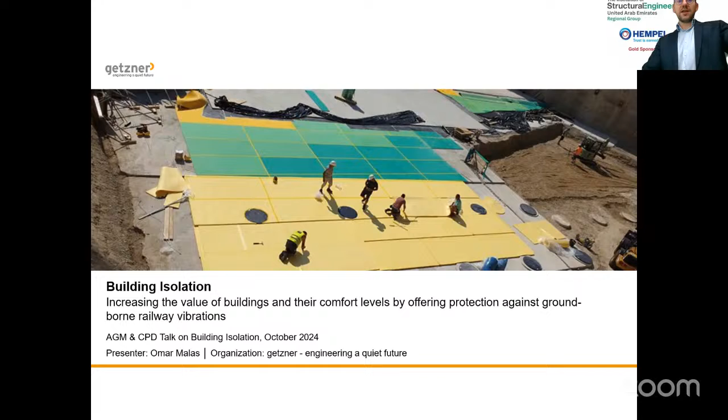Today, we would like to address this topic. The main target is to introduce the problem, introduce the solution, and a very interesting case study we have from Germany.

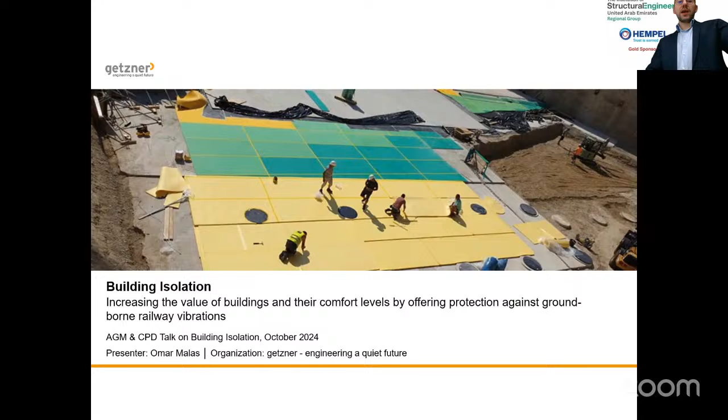We are increasing the value of buildings and their comfort levels by offering protection against ground-borne railway vibrations. Thank you, Iman, for introducing the team and I.

If my colleagues would like to say a few words about themselves or just to say hello, please feel free. Hello, Ulrich Gerhaher, my name. Yeah, I guess I was introduced good enough. I'm working for Getzner 10 years now. I don't think we can hear you, Ulrich. Oh, microphone is switched in. Online, but not okay. Sorry, you can't hear me? All right. Hello? Oh, okay. Okay, I can hear him. We can hear you online, but we can't hear you here in the room, so it's fine. But okay. Anyway, thank you, gentlemen.

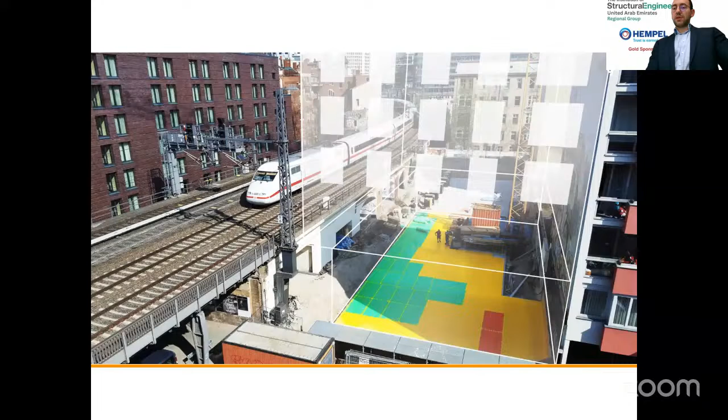Starting by introducing the topic, what you see on the screen is a project in Berlin, which provides a perfect example for the need of elastomeric or elastic building isolation. Here you can see a railway line directly adjacent to a construction site. Of course, vibrations occur every time the train passes by the building, and the vibrations are transmitted as structure-borne noise through the ground and then into the construction site. This project actually shows an example of a full-surface elastic decoupling with our products.

In this project we use the Sylodyn product, which is a polyurethane bearing. Like Iman said previously, Getzner has developed this in-house. These products are shown in green, yellow, and red, and are designed and installed to provide enhanced comfort to the building occupants by absorbing the vibrations and disturbance caused by the source. So in a nutshell, this is what Getzner does. We manufacture these highly advanced polyurethane products, highly advanced elastomeric products, for the purpose of vibration isolation in buildings and also other sectors.

It is important to distinguish between primary airborne noise and secondary airborne noise. The primary airborne noise is that which is transferred directly from the source, which in this case is the railway, to the recipient, which is the building, through the air.

The secondary airborne noise is the result of vibrations that are transferred from the source through the structure and the ground into the building, causing vibrations within the building that in turn transfer to what we call secondary airborne noise, or structure-borne noise.

So our company and our expertise, and in this presentation, we are addressing the topic of building isolation against vibrations and secondary airborne noise from railway lines that are coming into buildings that are still in the planning and design stage.

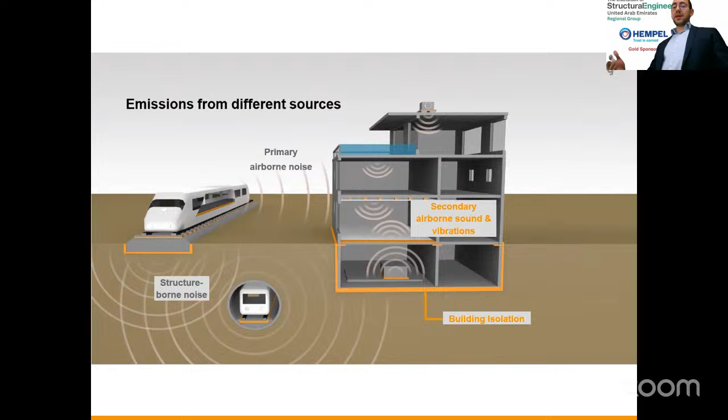There are several solutions from Getzner available. The bearings can be applied as full surface mats, or as strip or point bearings, depending on the various site and design conditions.

Just to briefly describe each solution: the full surface bearing is basically a full surface mat that's very easy to shape and install. It should achieve higher natural frequencies, i.e. lower performance compared to the point and discrete bearings. At the same time, little soil or subsoil preparation is required when installing this type of material in such geometries, and no changes to the structural design are required when installing full surface mats.

On the other hand, strip bearings are usually installed on strip foundations. They provide the ability to achieve vibration decoupling between individual floors of a building. They are more affordable than a full surface mat material-wise, and they achieve lower natural frequencies, i.e. higher performance. At the same time, they require special structural designs and special attention when doing the design of the building.

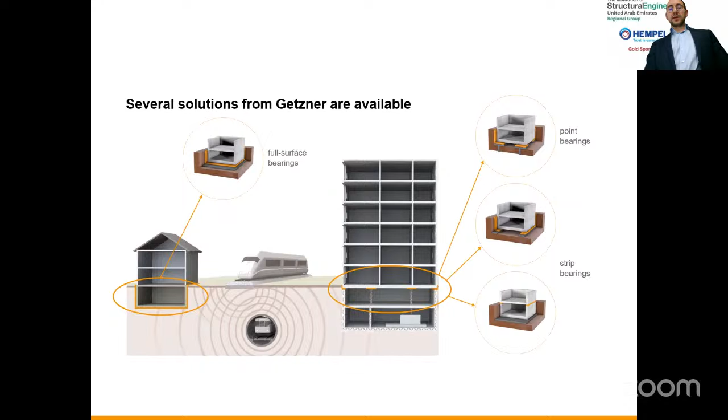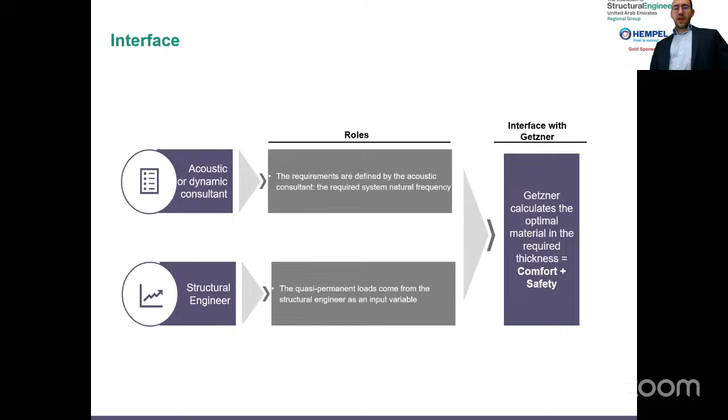So just to give an overview of where we fit inside the project, what is our relationship with different stakeholders from a technical perspective: we mainly have to engage with acoustic or dynamic specialists and structural engineers.

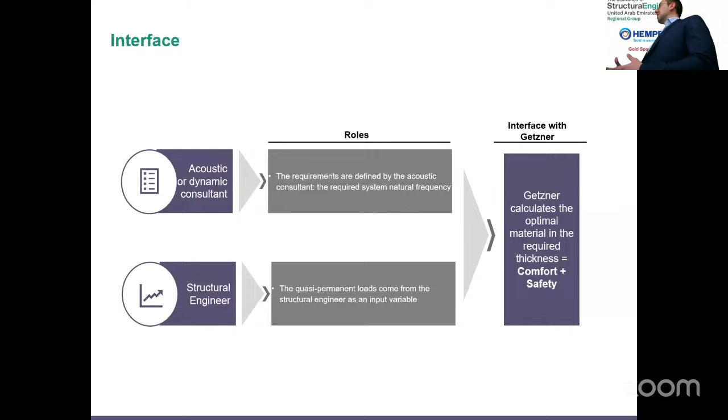Usually acoustic and dynamic specialists are responsible for setting the acoustic requirement in a building, mainly the natural frequency of the bearing, after they do their own measurements, analysis, and vibration prognosis. At the same time, the structural engineer's role is to provide us with the loads that would be acting on the bearings.

By having both input from the acoustic engineer and the structural engineer, we are capable of calculating the optimal material, the optimal elastomeric bearing with the required thickness, required stiffnesses, and required load capacities to fulfill the acoustic and load requirements.

This means that we are fulfilling the comfort criteria and also the safety criteria when we talk about acoustics and structural input. It is also important to note that all of these bearings must be certified by third parties, so that the properties of the products used in the calculations are actually verified in reality. This way, the safety criteria is also met.

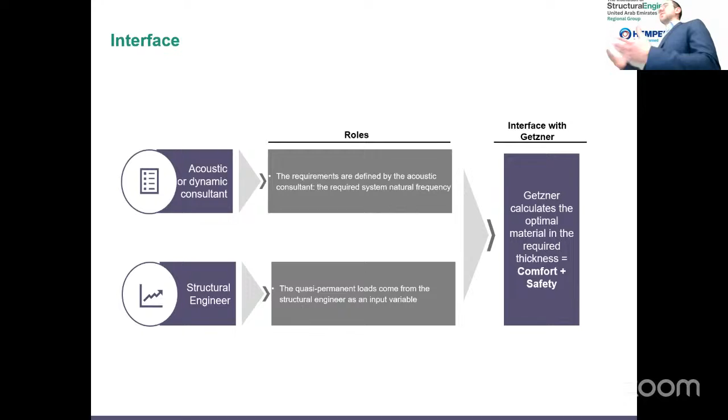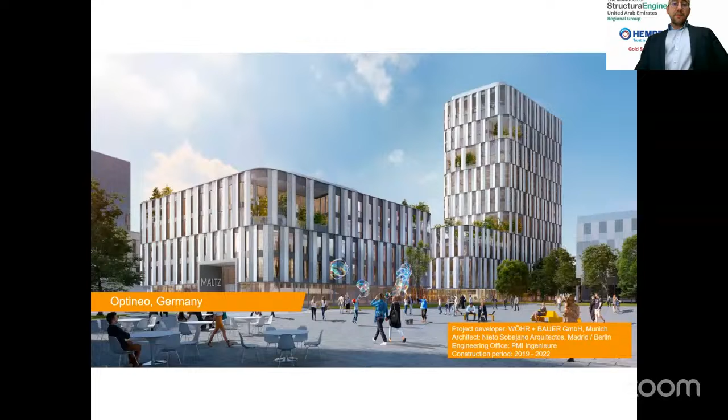I will start with an overview of the case study we will be presenting today. It is the Optineo project in Munich, Germany. It is a development with approximately 32,200 square meters of gross floor area above ground, mainly offices rented to KPMG, with restaurants on the ground floor.

There are over 1,100 square meters of roof terraces and loggia. The project developer was Wöhr + Bauer in Germany. The architect is Nieto Sobejano from Madrid, also based in Berlin. The construction period was between 2019 and 2022.

The development is actually located in the Munich East train station development area, which used to be an old industrial area, but right now is becoming the new trendy place in Munich with many mixed-use developments and concert halls. The challenge for developments in that area is that they're usually very close to the railway lines, including the Munich East train station, which is the second largest train station in Munich.

This means that the railway lines are at a distance of less than 50 meters from the Optineo, including a branch line of less than 30 meters. Here we're talking about all kinds of traffic, including freight, passenger, and long distance international trains.

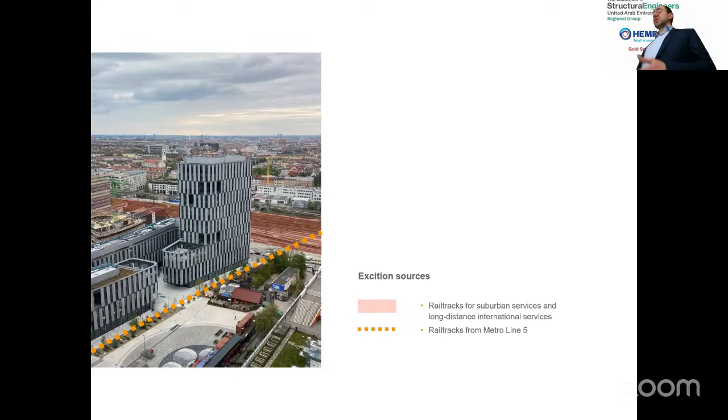At the same time, the main source of vibration is the underground Metro Line 5, which is dotted in the orange line you see on the screen. This line is actually 30 meters deep into the ground. Since the Optineo has around 3 floors underground, this means that the metro tunnel is roughly just 15 meters away from the building.

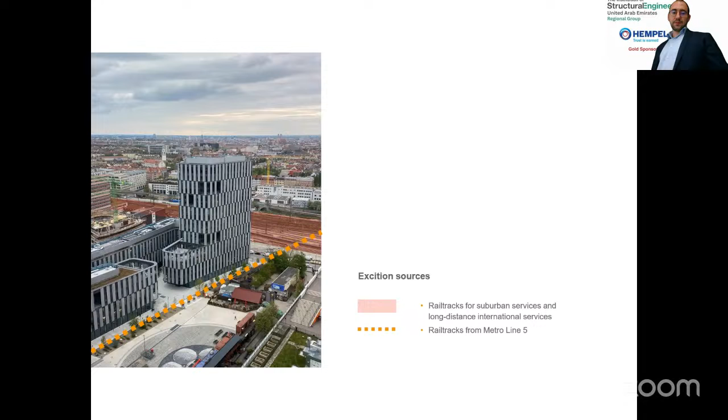There was a previous old building there, and the metro tunnel below that building has been there since the 1970s. It's an old tunnel, no longer the most stable, so no extra forces on the outer shell of the tunnel were allowed. Therefore, the deconstruction and construction of this old building had to be carried out gradually so that the loads on top of the tunnel do not change a lot.

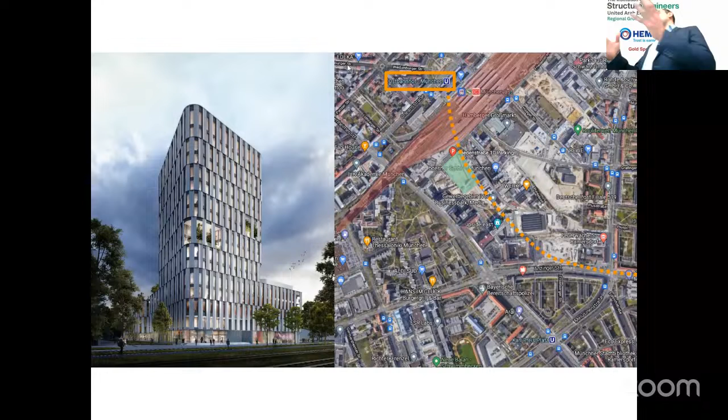This meant the construction company had to, after the deconstruction phase, mobilize the rubble gradually outside of the site so that the loads do not change drastically or quickly on the tunnel during the deconstruction and construction phase.

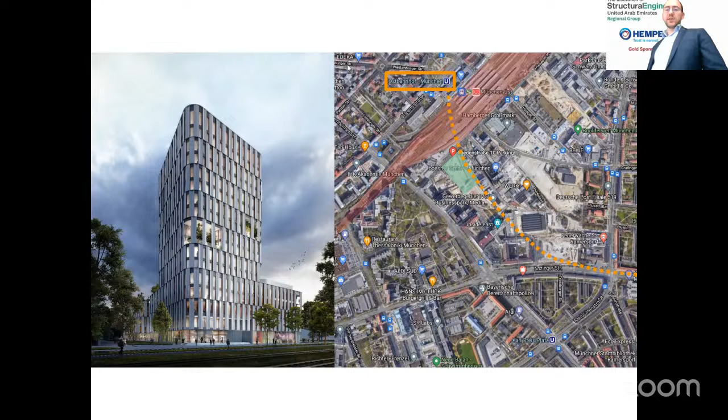A quick overview on the legal situation and project limits according to regulations in Germany. I won't go into detail about the acoustic requirements and standards, but briefly, the acoustic consultant and dynamic specialist had to ensure vibration levels do not exceed a certain KB value, defined and evaluated according to the German standard DIN 4150-2, which relates to the effects of vibrations on humans.

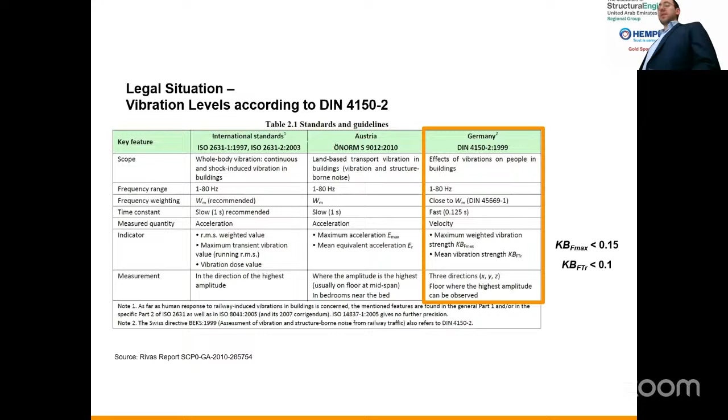This roughly equates to the limit fixed between 0.1 and 0.15, roughly equating to 0.45 millimeter per second in terms of vibration limits. There were also recommendations and guidelines regarding secondary airborne noise levels, such that the maximum sound level in this project should not exceed 45 dB.

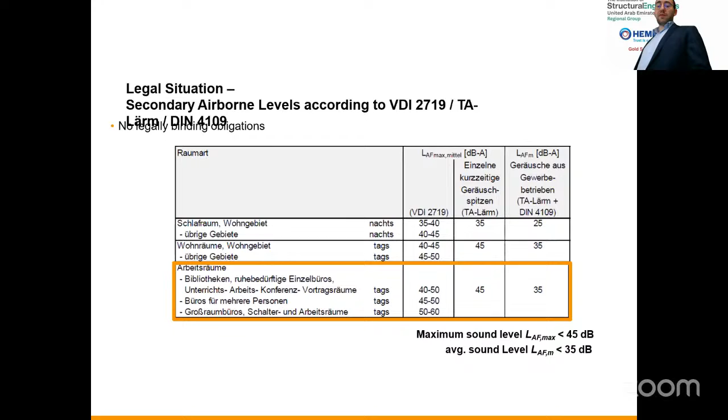Therefore, the dynamic specialist acoustic consultant was brought on board, and the measurements and prognosis model started in the project. The measurements on site had to be done in 3 stages.

The first stage was on the surface, where vibration measurements suggested the vibration levels are way higher than the limits. Then a second campaign of measurements took place at minus 12 meters, at the foundation level of the building using drill holes. They also suggested that the vibrations are actually higher than the limits.

Then a third campaign of measurements took place after the whole excavation was done, and they confirmed the values and results taken in the second campaign. In this project, the type of soil is gravel. It's quite stable, but at the same time it transfers vibrations into the building.

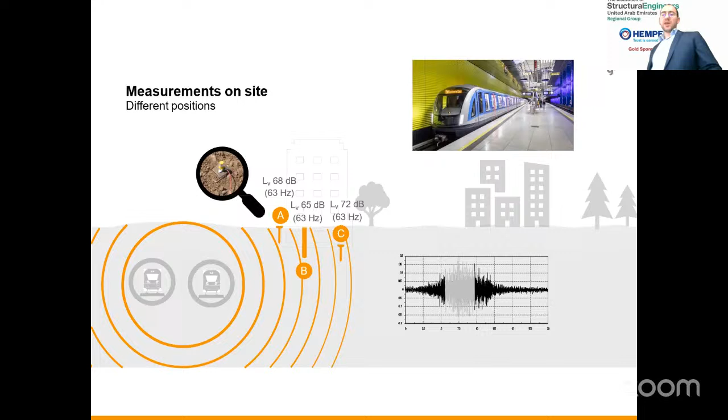It was also important to define the frequency spectrum. The main excitation frequencies are shown on the graph, and it was realized that the main vibrations and secondary airborne noise were happening at frequencies above 40 Hertz.

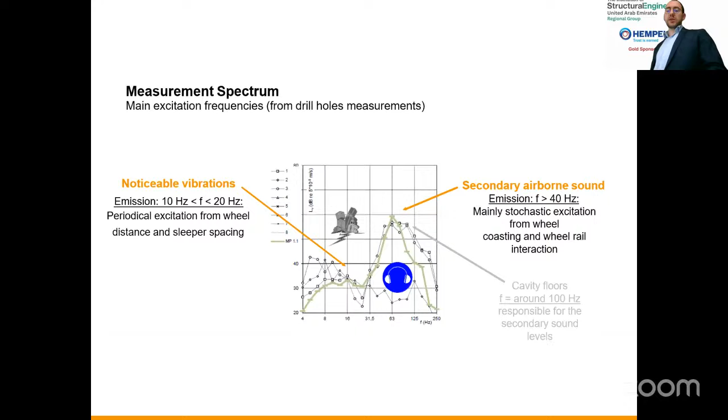In order to reduce the uncertainty in the transmission path, several measurements had to be carried out along the transmission path between the railway and the building. This is why you see the measurement points MP1 to MP3. As can be seen in the graph, the vibration level is actually reduced as the distance from the excitation source, the railway, increases up to the building.

This is due to the coupling effect from the soil to the building, which usually leads to further decrease in vibration velocities. At the same time, due to coupling effects of the building itself, you can notice an increase in vibration levels at MP5, because of the coupling effects of the building structure itself, which caused an increase in vibration levels due to the natural frequencies of the structural slab and the floating screeds.

It's very important to note that measurements alone are not enough. The realization of the excitation frequencies and the measurements alone are not enough to define the acoustic requirements and to realize the size of the problem. After those measurements are taken, these results should always be used as input in a vibration prognosis model made by the dynamic specialist, to eventually model the vibration levels and secondary airborne levels inside the building based on these measurements taken on site.

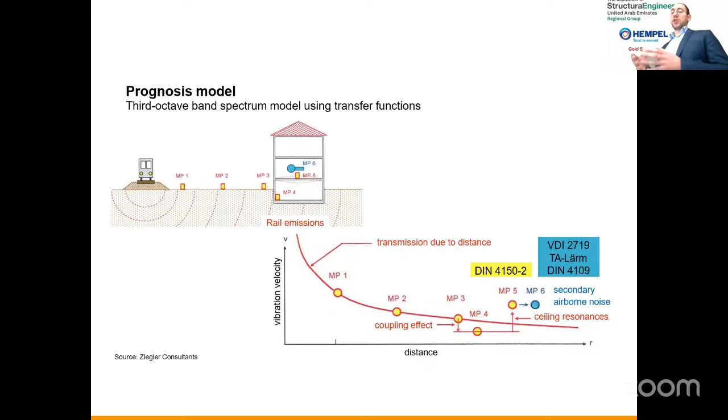This model, done by the dynamic specialist in a prognosis, depends on the building geometry, the stiffness of the ceilings, the walls, and the building structure, and also the sound insulation measures taken into consideration inside the building.

So the dynamic specialist in the Optineo project did a prognosis, and here in this table you're seeing the results without an elastic decoupling. After they did the measurements in the soil, they modeled the building, identified the resonance frequencies of the individual elements inside the building, and realized that the maximum sound level would exceed requirements.

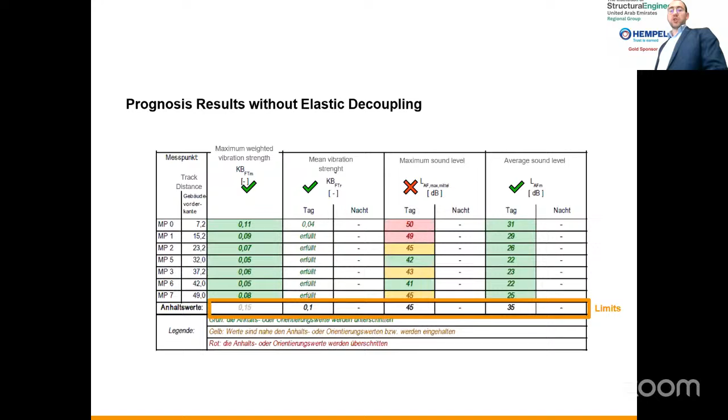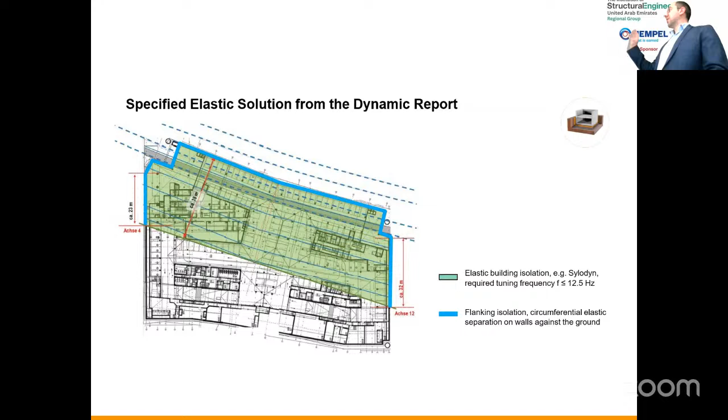At different positions the level will exceed the required limits of 45 dB in this project. Therefore, the dynamic specialist recommended that at least half of the building be elastically decoupled, with a solution having a natural frequency of less than or equal to 12.5 hertz. This led to the definition of the natural frequency requirement for the elastic bearing solution. According to the prognosis results, with the 12.5 hertz elastic decoupling, all acoustic requirements from vibrations and secondary airborne noise levels will be met inside the building.

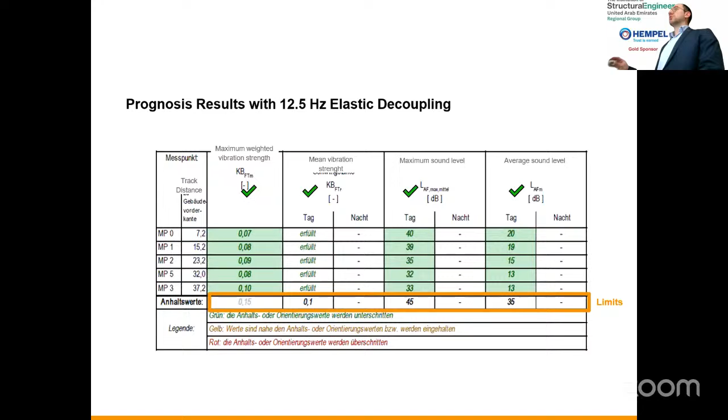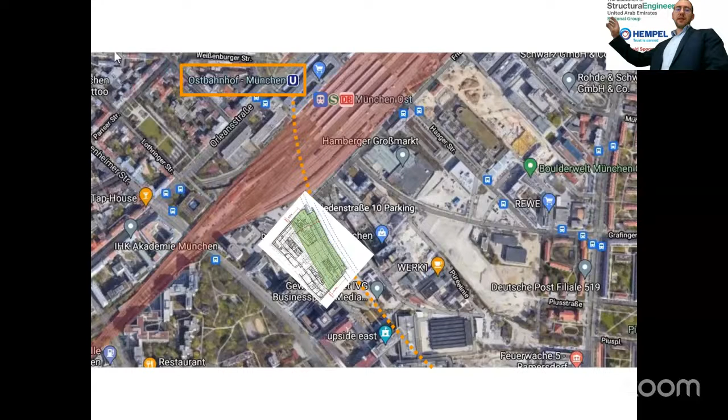Now moving forward to the solution itself - how does it look like on site, and what kind of material are we using? Here again we're showing the building and where the decoupling is happening as a footprint next to the railway line.

A quick note about the colorful material you're going to see in the next few slides - this is our brand, Sylodyn, used in this project. It's a polyurethane elastomer with pronounced spring characteristics, made of closed cellular structure, which means it maintains high performance even when submerged in water, without losing its dynamic and static properties.

It's able to maintain its mechanical properties for the lifetime of the structure. You can see different colors because each color represents a different type of material, and each type has a different static load limit. The materials can withstand up to 24 Newton per millimeter square as load peaks, and they have a very low creep tendency.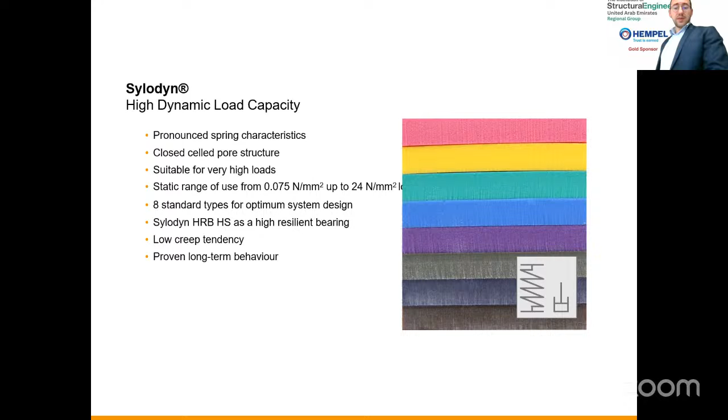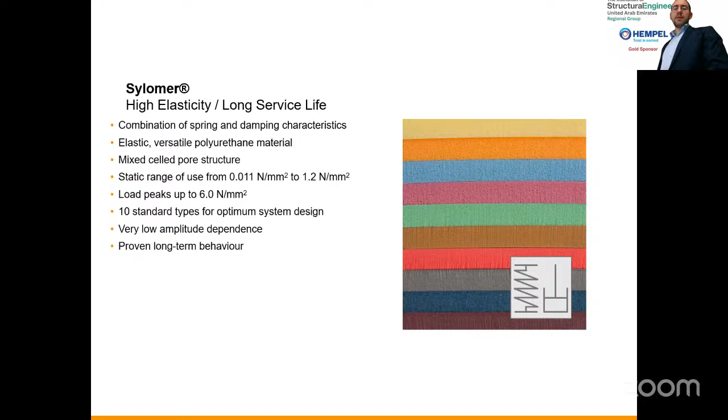We also applied our Sylomer product line. It's very similar to the Sylodyn line but with higher damping properties, used mainly in areas like foundation side mats that are not submerged in water, because it's made of mixed cellular structure instead of closed cellular structure. It also has different varieties and colors representing types with different static ranges of use, up to 1.2 Newton per millimeter square. We used it in part of the foundation, which I'll talk about shortly. There are 10 different types of Sylomer, with proven long-term behavior and characteristics.

So again, we got the requirements from the acoustic consultant - the natural frequency requirements - and we got the load input from the structural engineer. We worked closely with both stakeholders to design a material and create a material proposal that ensures comfort levels are met and safety requirements are also met.

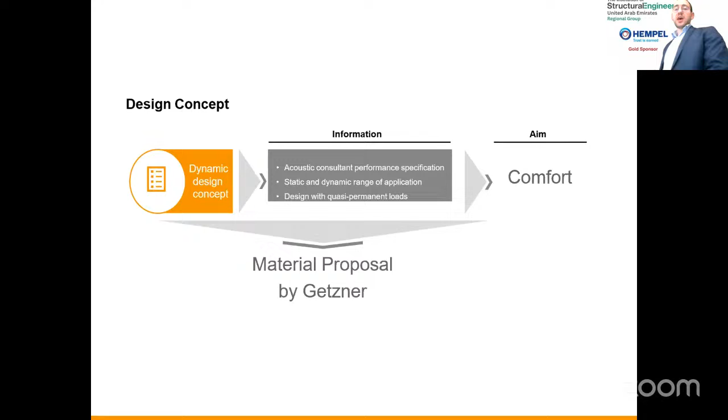Here we're showing a screenshot of the calculations we made for the engineer - a calculation with full surface bearing. The material selection is made with the loads on the static range of use of the bearing, so different types are installed in different positions depending on the loads acting there. In this calculation, the natural frequency of the individual bearing is calculated, and subsequently the average natural frequency in relation to the building, which in this case was calculated to be 11.6 hertz - less than the required 12.5 hertz by the acoustic engineer. This means the product fulfills the requirements.

As you notice, Sylodyn was used because most of the horizontal mats applied were submerged in water - the groundwater was around 8 meters below surface level - and Sylodyn can maintain its performance even when permanently submerged. Loss factor is also mentioned in our calculation because it aids in the effectiveness of the isolation due to the difference in impedance between the soil and the elastic bearing.

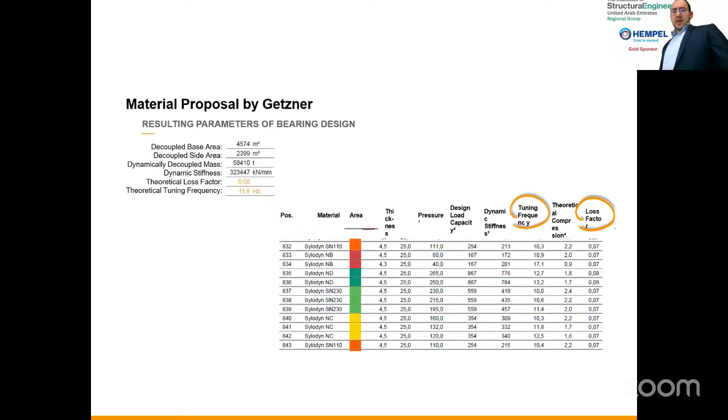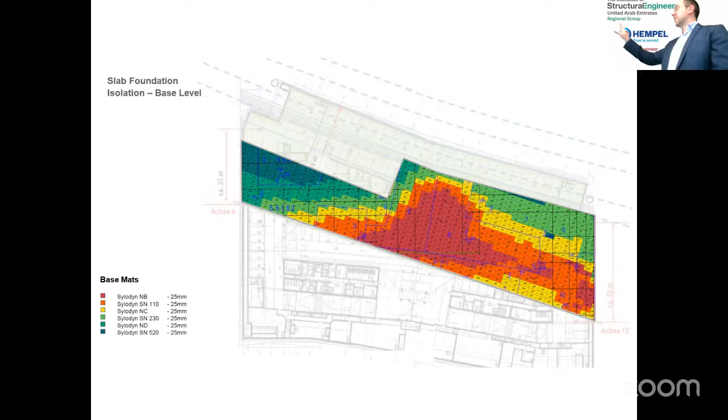And we provide this map for ease of installation on site. Here you can see the map with the actual installation on site. The mat is provided in sheets or rolls, and the joints of those sheets are taped with a joint tape so that when concrete is poured, it doesn't pass in between the joints and cause what we call a sound bridge or a vibration bridge.

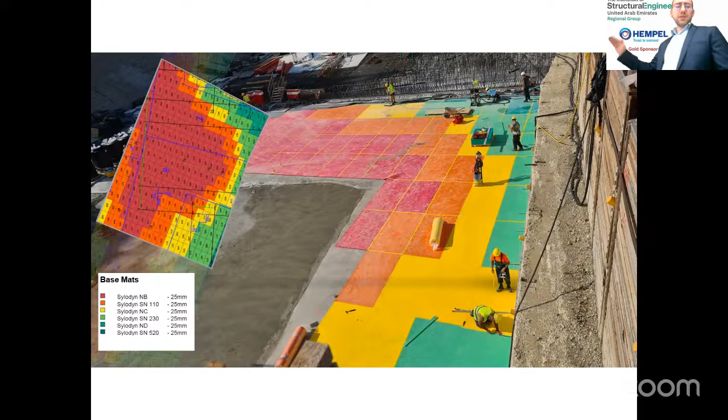At this level, the materials are installed on a blinding concrete layer. Here you can see another photo where the materials are installed at the base level. A PE foil is installed on top of them, and then a screed layer is installed on top of that. Afterwards, they start with the heavy reinforcement before installing a 3-meter thick slab in that area.

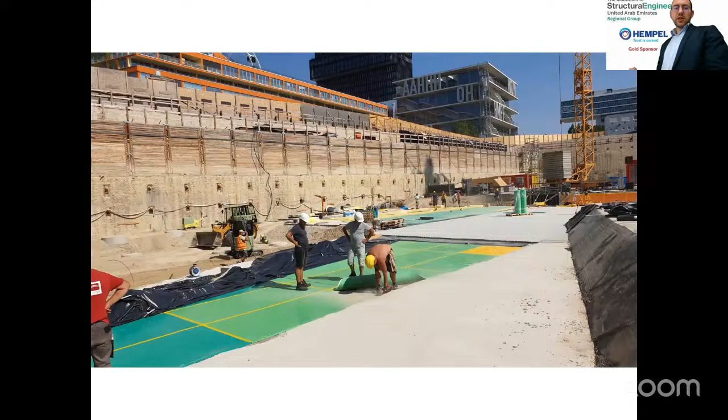Here are additional impressions from the site. The material, as you can see, is very lightweight. It doesn't require skilled labor to install.

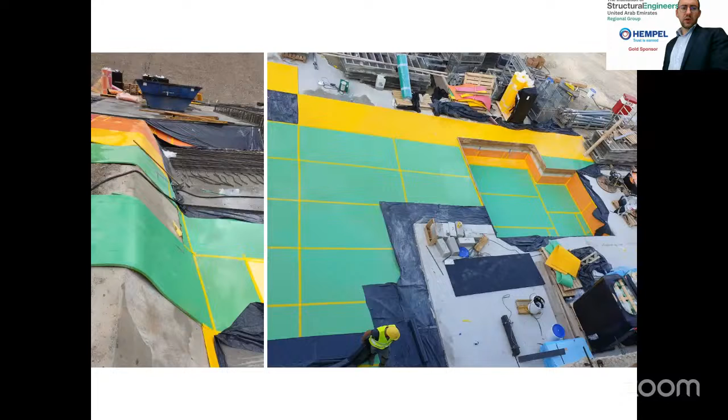The materials cover in green, yellow, orange, different geometries, even pits, and it's covering the whole area so that no gaps, no areas remain unisolated.

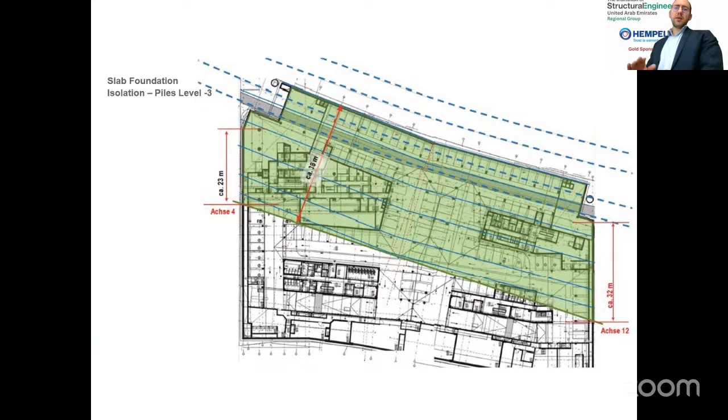Also in level -3, there were piles because there were piles in some areas, because on top of that area there was a 10-story building. So this section of the development had the highest loads.

And as we said previously, there's a tunnel beneath this development. So in order not to increase the loads on the tunnel, piles were installed or were constructed in that section specifically to transfer the loads to a lower part of the soil, in order to avoid activating the outer shell of the tunnel with additional forces.

And on top of the piles, on the pile caps, our stiff bearings were installed that I will show you in the next slide.

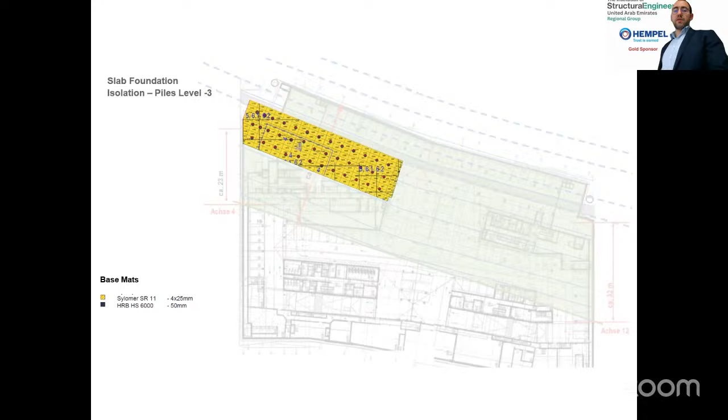The yellow material in between is a soft Sylomer material in 100 mm thickness that was used mainly to avoid compression force. This means that the piles were taking the loads alone. The bearing on the pile cap was taking the majority, the main load, and transferring it to the lower parts of the soil to avoid activating the loads on the tunnel, while the infill material in yellow was just used to avoid the compression force. So it wasn't actually taking the loads.

And here you can see a better, clearer photo of it from the side. You can see the black dots where the piles are located. And on top of this area is the 10-story building.

In the black dots, we have installed our stiff HRB HS 6000 materials that could withstand 6 Newton per millimeter square in permanent loads.

And they're installed as round bearings. And again, as I said, the yellow material is the Sylomer material used just to avoid the compression forces, to absorb the compression forces. It was compressed by around 25 millimeters. Then on top of that, there's a slab thickness, which is around 3 meters.

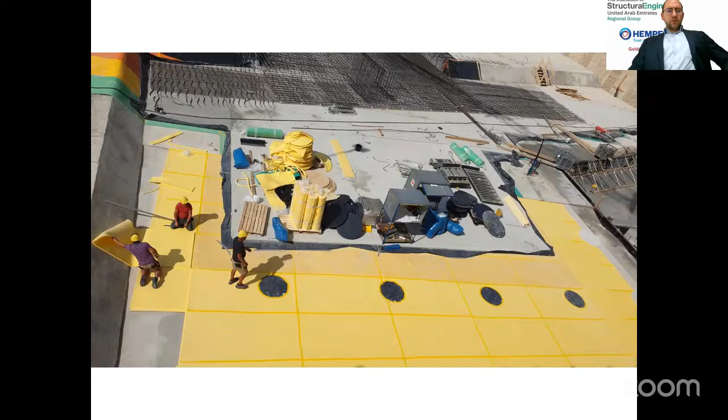Here you can see additional photos of the same area. They are, as you can see, materials very easy to handle on site, very lightweight. PE foil being installed, screed being installed on top, and then as you can see at the top of the photo, the reinforcements are also installed on top of the lean concrete.

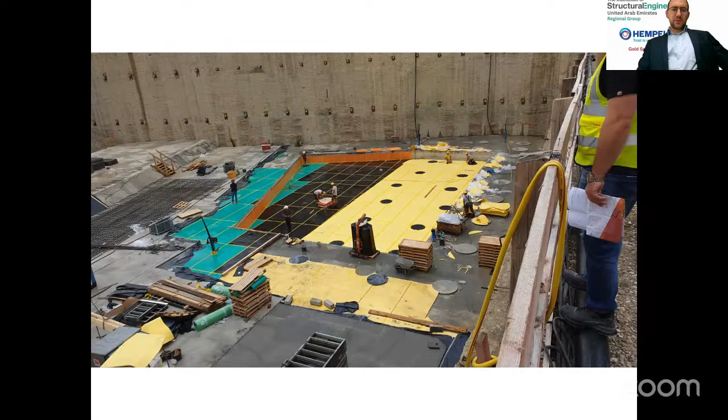Additional impressions from the site. And here you have clearer pictures of the pile cap and the pile bearing in black, and the yellow infill in Sylomer 11 in that area.

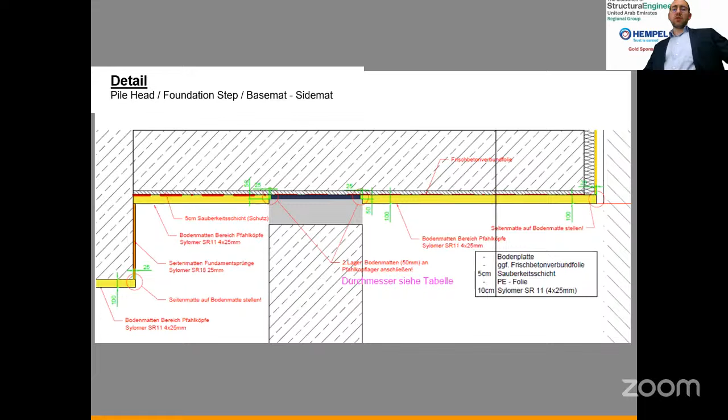And this was kind of challenging to construct, because again the backpack would mean additional loads on the tunnel. So here they had to think of an innovative way of building the backpack in a way that the loads are not immediately going to the tunnel.

So what's happening here is that the loads are actually being transferred to the piles instead, rather than being transferred from the backpack directly to the tunnel.

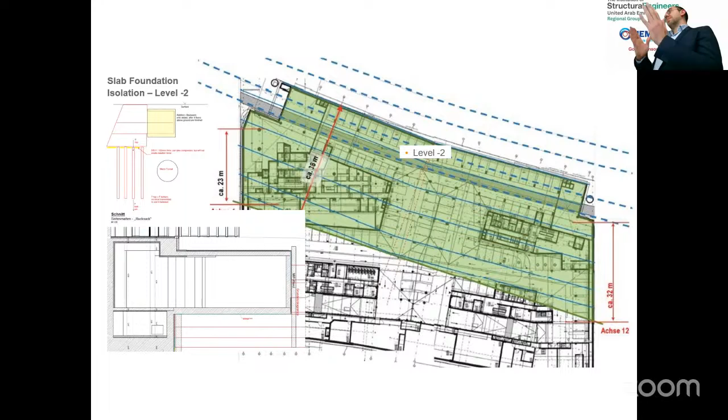This has been done by first building 4 stories of the building above the surface, so that there's a balance before introducing the backpack in the other section of the building. Therefore, the loads are now being carried by the slab and the piles instead of being transferred from the backpack to the tunnel and then creating instability in the tunnel.

This also meant for us that the materials we have to use below the backpack are actually of a softer grade, because we didn't need a material that would need a very high static range of use with very high static load capacities.

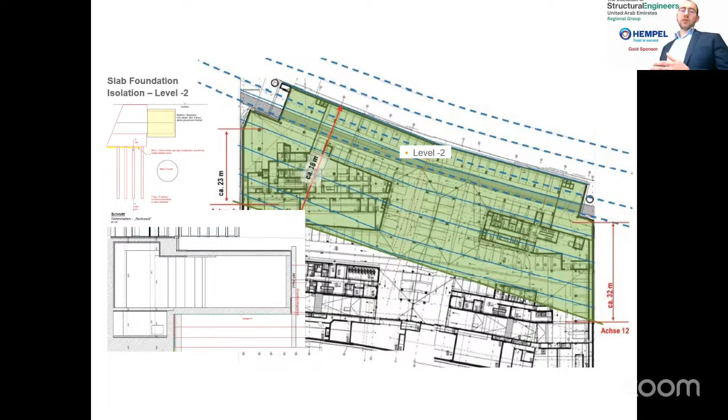With this way of construction, the building will settle just uniformly, because initial studies showed that the piles will settle around 2.5 centimeters, and the backpack would also settle, which wasn't good for the tunnel. This is why they started building first 4 stories above the ground, and then built the backpack, to avoid the settlement of the backpack and protect the tunnel.

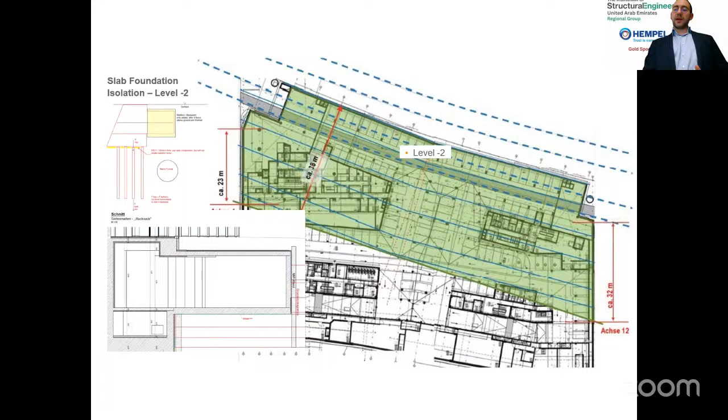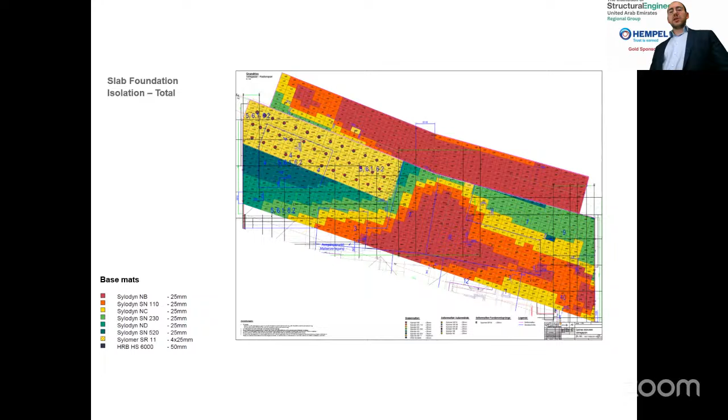Here in this slide, you're seeing the overall isolation. So now we have the full picture complete. We have the isolation of the piles, in level -3 we have the isolation in the base, and finally on top, in mostly red color, the isolation of the backpack in level -2.

Here we were talking mostly about the horizontal isolation, but it is also important to make sure that the lateral isolation of the sidewalls of the buildings below the ground are also decoupled, because vibrations can transfer also horizontally and then into the building itself. So it was very important to isolate the sidewalls of the building underground.

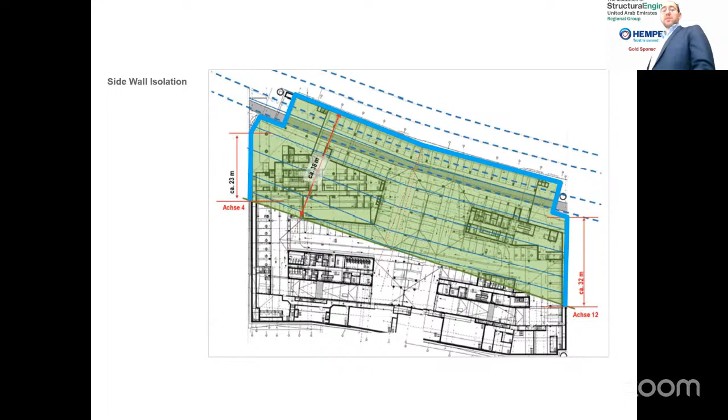Because of the challenge of the groundwater, it meant that 2 different types of product lines needed to be used, since almost half of the sidewalls down to -8 meters were submerged completely in groundwater. We needed to make sure that the material installed below water could maintain its performance over the long term of the project. This is why we used Sylodyn material below ground, and above ground we used Sylomer material, which wasn't required below the groundwater level.

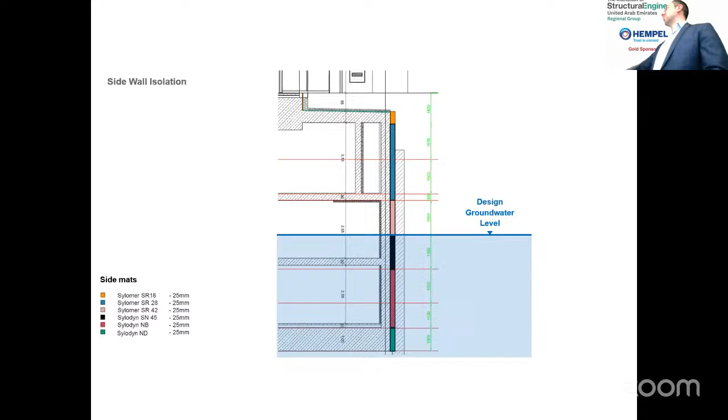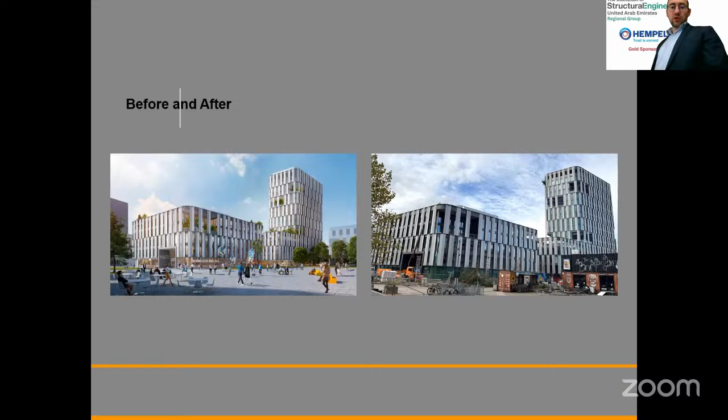Finally, we show you the results before and after. On the right-hand side of the screen, you see the photo of the building after it has been constructed, or almost towards the end, and the measurements taken afterwards prove that the prognosis made by the acoustic consultant was actually correct, and the material is performing as per the prognosis.

All the vibration and maximum sound levels are met. This means that people can work comfortably in the building, and that the value of the building is high. The owner of the building, the developer, could rent it out to companies like KPMG without any complaints, and without KPMG looking for a different office elsewhere because of continuous noise and vibration problems.

So this product was an initial investment in the project. At the same time, it increased the value of the building a lot. It allowed the developer to rent out his building, increase the profitability of his asset, and make the best out of it. Thank you for your attention.

Yes, so all in all, this is our daily business. We have been reducing vibrations, solving vibration issues worldwide for the last 55 years in the railway, construction, and industrial sectors. We'd be happy to support you in any way.